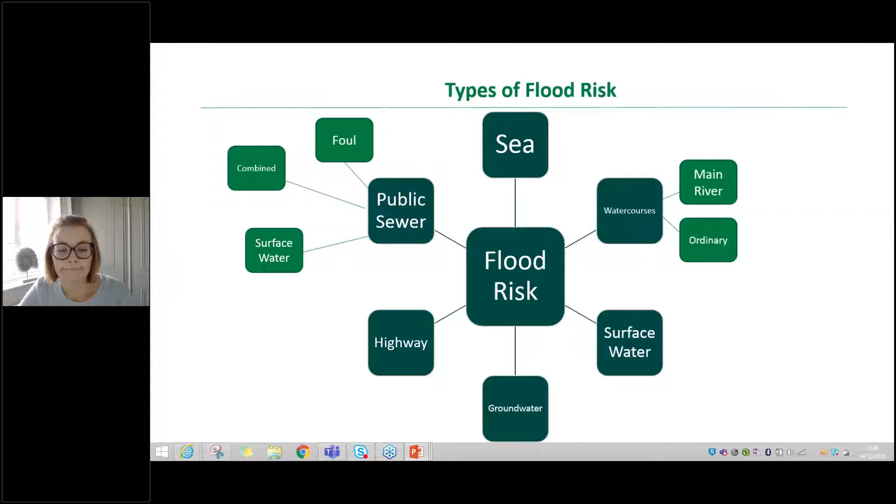So when we look at the different flood risk and we put on top of that the flood risk management authorities, you can see that there are a number of different flood risk management authorities, and these include the Environment Agency, who are responsible for flooding from the sea and also flooding from main rivers, which you can see on the box on the right hand side there.

You've got the Lead Local Flood Authority, which is responsible for regulating flood risk from surface water, groundwater, and also from ordinary watercourses. You've got flooding on the highway, which remains the responsibility of the Highway Authority. So that is typically your county council or unitary authority, but it's a separate department within those councils typically. And then, of course, the Water and Sewage Company is responsible for flooding from sewers. Next slide, please.

Okay, so what's the connection between flood risk and planning? Well, it sounds quite obvious, doesn't it? But put simply, if any new development or redevelopment or any changes in land use are not properly managed, they could negatively impact on our environment by increasing the surface water runoff during rainfall events, leading to an increase in flood risk either on site or elsewhere. They could also increase the number of properties at risk.

So, for example, if you build properties in a floodplain or in a surface water flood zone where it's inappropriate to build those properties, you could put more properties at risk of flooding. And as I said earlier, any property built after the 1st of January 2012 is not eligible for funding from the government to resolve those issues.

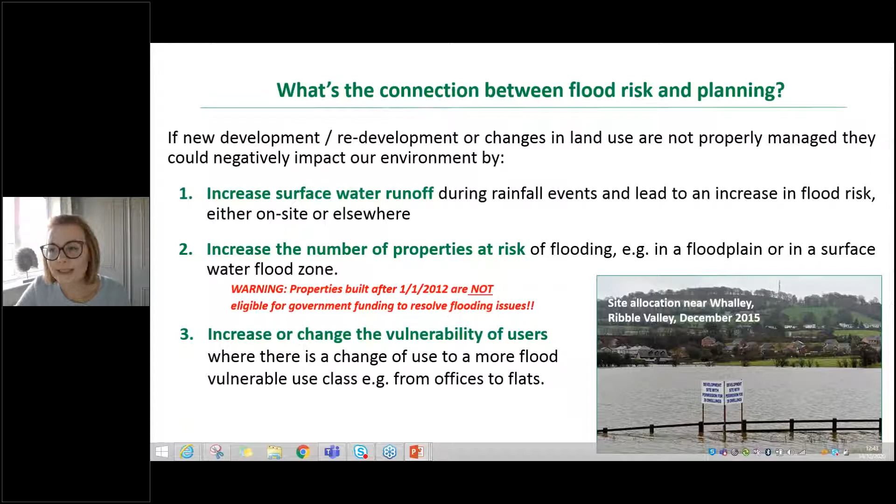One of the things Sophie and I don't want to do today is focus on the negatives of flood risk and planning. We also want to look at what the positives are and what the opportunities are that development can bring. So we recognise that new development and redevelopment or changes in land use is also an opportunity, because we can better manage flood risk by better managing our water on those sites, so that it becomes less of a problem and more of a feature.

Leading on to point 2, we can enhance the landscape of flooding. So what I mean by that is where you do have site allocations, where part of the site allocation is in flood zone 2 or 3, or is at surface water flood risk, rather than simply just leaving that land undeveloped to soak up that water, actually looking at that as an opportunity for enhancing that flooded area.

So, for example, could we make a wetland or some form of habitat that will enhance the biodiversity as well? So if we have to leave it undeveloped, okay, fine, but what can we do to improve and enhance that area of attenuation, if you like, or that area where we're going to allow it to safely flood?

Point 3 is around contributing towards a network of blue-green spaces, providing amenity value and a range of benefits to people who live on those developments and also visit and work on them as well. So, for example, there's loads of health benefits where people like to be alongside water. It's supposed to be very calming. It attracts loads of wildlife. It contributes towards biodiversity net gain. It encourages people to get outside.

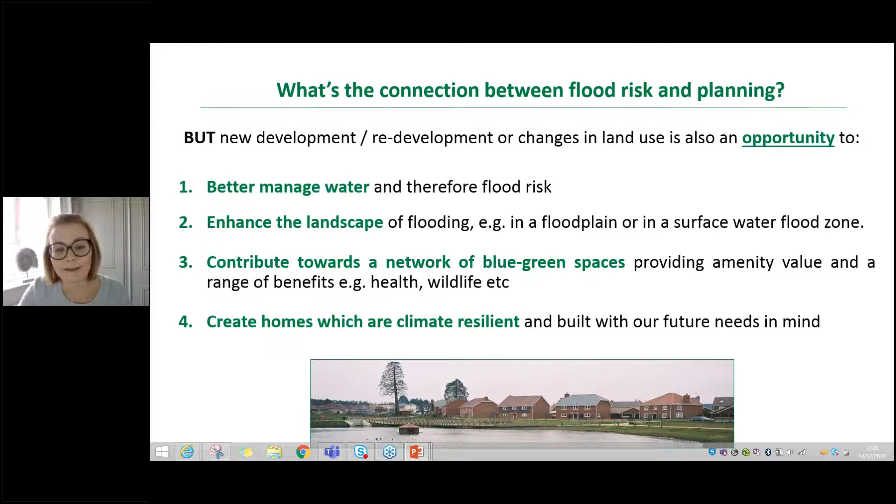So in terms of what are sustainable drainage systems and what do they do? Well, sustainable drainage systems are designed to control surface water runoff close to where it falls and to mimic natural drainage as closely as possible. That you can find in the planning practice guidance under the flood risk and coastal change section. Sustainable drainage systems have fundamentally 4 pillars: quantity, quality, amenity and biodiversity.

Water quantity looks at controlling the quantity of runoff from development to support the management of flood risk and maintain and protect the natural water cycle. The quality aspect is looking at managing the quality of the runoff to prevent pollution. So in other words, how do we require a treatment train to be installed to capture those pollutants and ensure that they're not causing an issue further downstream in those watercourses?

And not just our watercourses, but our bathing waters as well, because we often forget that eventually that water has to go somewhere, and we want to make sure that it not only improves our water quality, but also our bathing water quality as well. In terms of biodiversity, helping to create and sustain better places for nature, contributing towards biodiversity net gain and natural capital. And of course, amenity, to create and sustain better places for people.

So that's all about the urban design, it's about the placemaking, it's about what sort of communities do we want to build going forward, and how are we integrating sustainable drainage at the heart of that to allow that to be achieved effectively. Just some photographs there on the bottom, to give you an example of a swale, which is one sustainable drainage component. You can see what it looks like there in dry weather and what it looks like in a storm event.

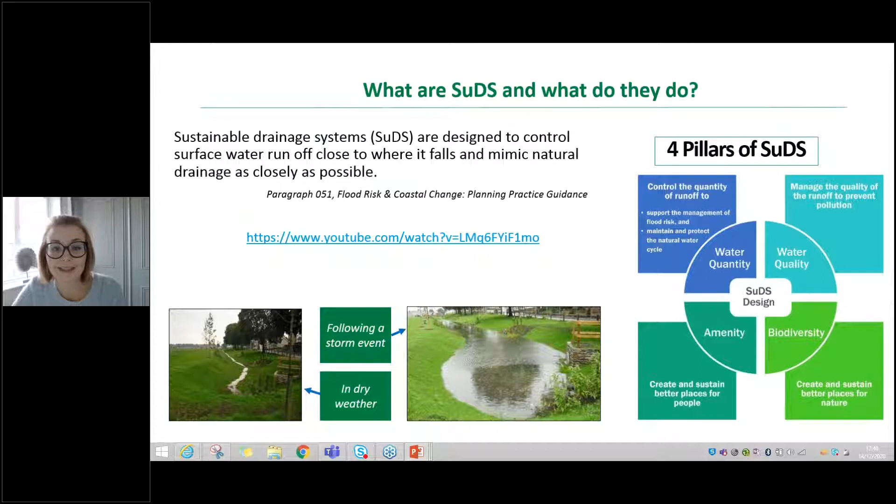And it's a really good way of communicating to residents and politicians and other people who visit the area the fact that that swale is actually doing its job. It's not a problem, the fact that it's filled up, it's actually doing its job. Next slide, please.

So in terms of what sustainable drainage components there are, they can be broadly split into 3 categories. The first one being source control, which basically means that where the water falls, at source, those components will help to gather that and to manage it really well. Source control measures are particularly good for managing everyday rainfall. So they're those either short, drizzly events, or the ones that aren't particularly heavy rainfall.

They're particularly effective at managing that and actually holding the water back out of the drainage system entirely by helping it to absorb into the ground and to capture it through things like water butts, green roofs, grey water recycling systems and things like that. So basically it's about how do we capture that water and how can we prevent that from getting into the system in the first place. The second one is then looking at conveyance. So these are sort of transport sustainable drainage components.

They can be both rural and urban. A really good example is shown on the photographs there, where you can see a linear swale, which is green, which is integrated within the housing development on the left one, compared to the concrete rill on the top right, which is, as you can see, in an urban area, and it's separating an area where pedestrians walk and service vehicles go through that urban centre from some bike storage facilities as well.

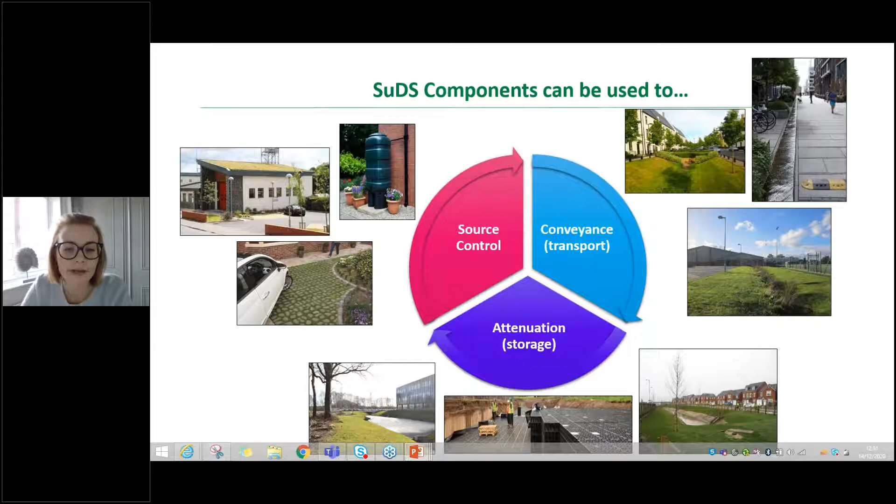So what does the National Planning Policy Framework say about sustainable drainage systems? Well, it says quite a lot. It talks about everything from preventing development from the adverse effects of water and improving local conditions, to responding to climate change, to building that resilience for the future climate need that we spoke about. It talks about providing adaptive measures to help reduce the vulnerability of places to flooding as well.

But principally, paragraphs 155 to 165 are the really meaty, chunky section, looking at sustainable drainage, but also flood risk management more generally. And they talk about using a SuDS approach to help locate development in appropriate places. So in other words, moving development away from those high-risk flood areas, and not just flood zone 3, which corresponds with the fluvial flood zone, but also high surface water flood risk zones as well.

It helps us to assess the suitability of development and prevent flooding by making new developments flood resilient and flood resistant. It helps to provide measures to enable development and to mitigate problems. But one of the biggest things that I've noticed from a policy perspective is that it includes a new safeguarding policy option to allow planners to actually set aside and safeguard land for current and future flood management.

So particularly around sustainable drainage systems, I've started to have conversations with planners in my area about going forward with their local plan revisions, whether they would look at safeguarding, particularly on major developments, a percentage of those sites for sustainable drainage systems, in the same way that we can safeguard or require a percentage of a major development for public open space, for example.

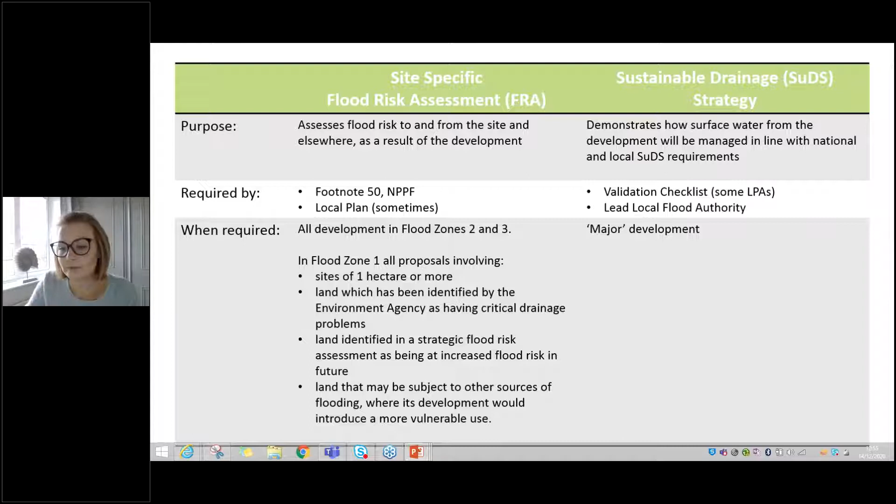Regardless of what the NPPF says and regardless of what we say as flood risk management authorities, we absolutely have a dependency on the planning system to deliver successful sustainable drainage systems. That's all the way through from the initiation discussions around what are the ambitions of the local authority, what are the ambitions of the developer, through to the design of the sustainable drainage system and fundamentally the design of the development as a whole. And then looking at the approval stages, so getting that planning permission, the consultation process, etc., through to the construction, where building control go out and will inspect. If there's any issues during construction, there need to be amendments, particularly non-material amendments, to those planning permissions. Again, that is down to planners.

Through to maintenance and enforcement as well of any of those planning conditions if things do go topsy-turvy. So there's an absolute dependency on our development management planners and the planning system to be able to deliver those successful SuDS. There's only so much we can do as flood risk management authorities, and we are absolutely committed to working with you and building those relationships to enable that integrated working to happen to deliver those high quality sustainable drainage systems. Next slide, please.

One of the things I just wanted to touch on today was looking at the hierarchy of drainage options. So fundamentally, this has come from the planning practice guidance, and this describes and explains how surface water from a development site is expected to be discharged, in order. So developers are expected to explore how they would discharge or get rid of that water by putting it into the ground through infiltration, then putting it into a surface water body such as a pond or a swale or a watercourse, and then looking at discharging it to a surface water sewer, a highway drain or another drainage system, before then, as a last resort, looking at a combined sewer option.

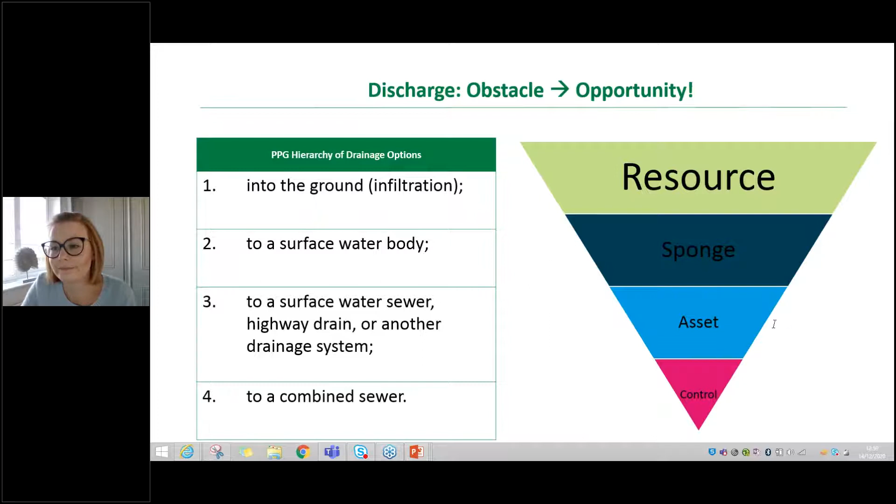In terms of the benefits of sustainable drainage systems, there are so many benefits, and we've spoken already about quite a lot of those, but they help to facilitate sustainable economic development, high quality and inclusive design, regeneration opportunities. They protect and enhance the environment. They can create urban resilience as well. They obviously contribute towards biodiversity net gain and natural capital, and towards a low carbon economy and transition towns. They contribute towards really great space and placemaking, and of course they help develop a focal point for communities.

We just want to draw your attention as well to a tool that has been developed by CIRIA, C-I-R-I-A, which is called the BEST tool, which helps measure the multiple benefits of sustainable drainage systems. And at the end of the presentation, you can find a link through to the BEST tool there as well for you to use after the presentation today. Next slide, please.

Okay, so policy plus development management equals successful SuDS. So the starting point for development management decisions is the development plan, and a key material consideration of that is, of course, flood risk management and looking at how we can contribute towards blue and green infrastructure and how we can build in climate resilience. But whilst the NPPF is good in many ways, its overarching purpose and function means that its content and instructions tend to be broad in tone. Local plans can contain really good policies regarding SuDS, even if these frequently involve interpretation and debate regarding their application.

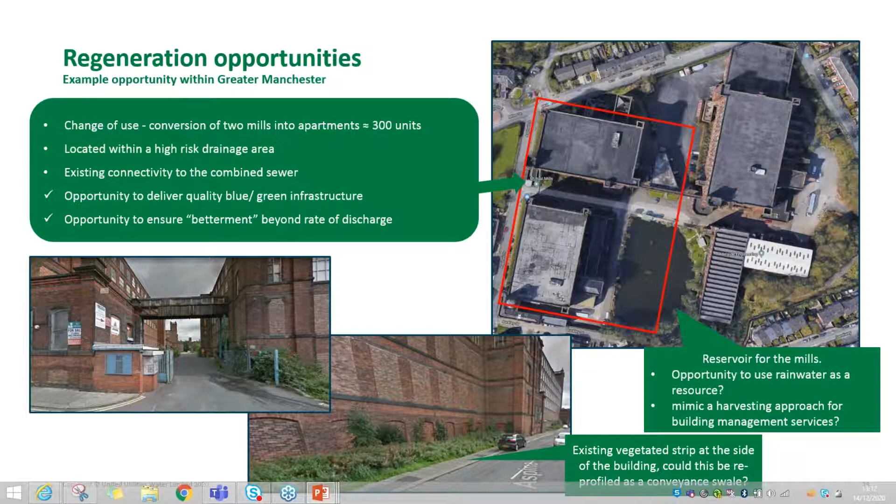But now, before we go into the development sites, and I suppose this applies more to the greenfield site scenario, I just want to remind people of what the SuDS approach is. So it's informed by the site characteristics, and it tries to mimic the natural hydrology of a site. So Laura's talked before about source control. So how do we first and foremost use it as a resource? And then in terms of source control, how do we manage it close to where it falls?

Manage runoff on the surface, allow it to soak into the ground via infiltration, promote evapotranspiration, which is fundamentally water being taken up by plants and transpired, as well as evaporation from the leaves. Slow and store that runoff to mimic what happens naturally, because it's not natural having hard surfaces that generate a lot of runoff quickly and take it to that receiving environment. And then how do we treat it as well as required?

So these images are taken from the CIRIA manual that just shows how you can consider where those natural flow paths are across the site and those areas that are suitable for infiltration. How can you then start considering, well, where does water naturally pond on that site based on the topography and levels? Is there a natural low spot where water would naturally accumulate?

And then thinking, okay, well, actually, can we have a linkage between the blue and green infrastructure on the site? So can we here utilise that for that water storage and provide that as part of our green space and public open space allocations? And then starting to map out the network of where that drainage may need to go.

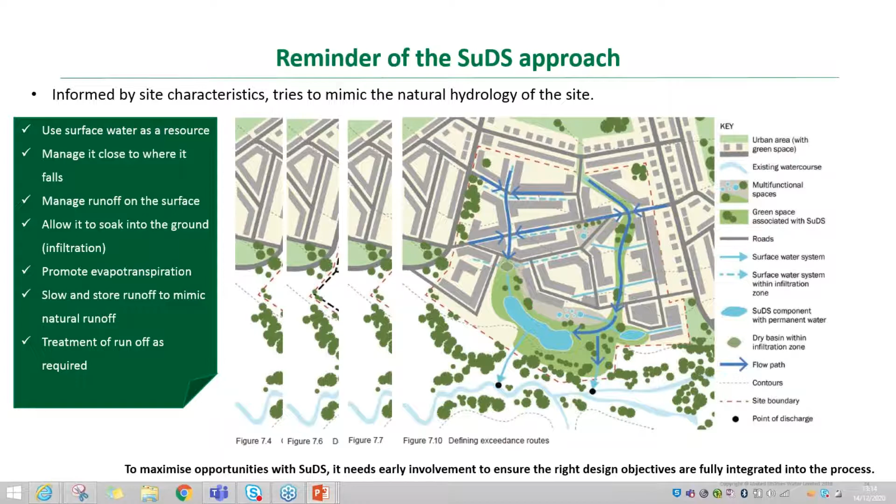And then lastly, once you start having houses there, how do you look at the exceedance routes so that actually you've got climate resilient infrastructure and development, that housing layout's been informed by how water flows across that site and how a flood and exceedance condition would go across the site as well.

So again, SuDS and blue-green infrastructure, there's a natural and strong relationship with them, just to reinforce that. It's about working with the natural landscape, and it's central to the delivery and performance of SuDS. It is just a key function of blue-green infrastructure. So I'm conscious we did talk a lot about flooding earlier on, because I think that's really important for people to have that awareness. But actually, all sites, regardless of size, location, flood risk, how do we make sustainable drainage business as usual to access all those wider benefits?

So some points to think about. So I guess this is learning from experience now as we start to talk a bit about adoption in a minute. So there's a lot of evidence that well-designed SuDS provide many health benefits. The blue-green space is important for urban quality of life. It helps with things like air quality improvements, moderating extreme temperatures, heat island effect, etc., mental health and well-being, and promoting physical activity. But one key thing is actually well-designed SuDS for amenity are also usually safe SuDS.

And that's just one thing that I want people to think, how can you look at that earlier? Because as well, that'll also mean that it's more likely to be in accordance with best practice guidance in terms of its design, which therefore means it could be adopted, because we do have challenges where we're unable to adopt some systems that are presented because everything's fixed and they haven't actually designed it in accordance with standards. So the better looking and more natural it looks, the more it tends to be welcomed by a community as well, and that's really important for placemaking and developing communities. And again, good visual appearance usually results in a safe design.

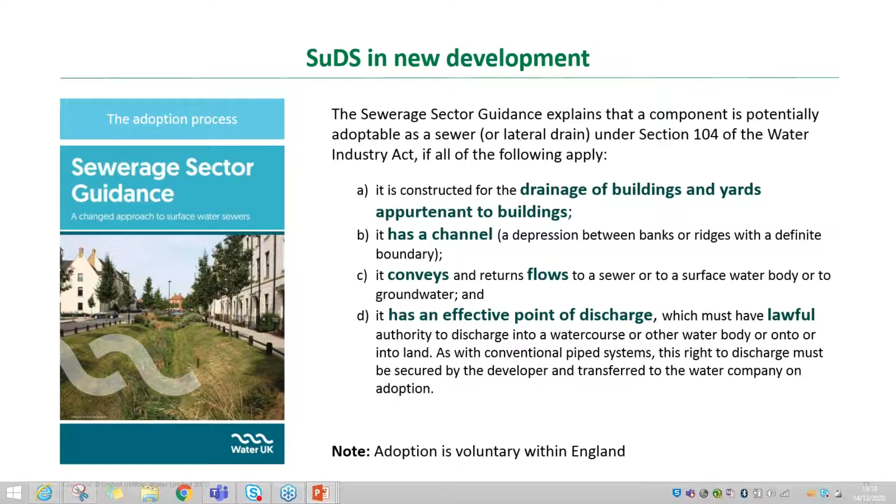So in terms of the adoptable components, these are just images taken from the CIRIA manual. It just shows that these are ones that can potentially be adopted. Now, it's just important to say that we still don't have a legal basis to adopt SuDS, but instead we're saying certain SuDS can come within the meaning of a sewer. So it does feel like perhaps stronger policy and legislation is still needed within England.

And our statutory obligation is actually to ensure we can effectively drain a site. So sometimes there are just partnership approaches with local authorities and with management companies, etc., as well, in terms of maintaining things in accordance with any planning approved landscape management plan.

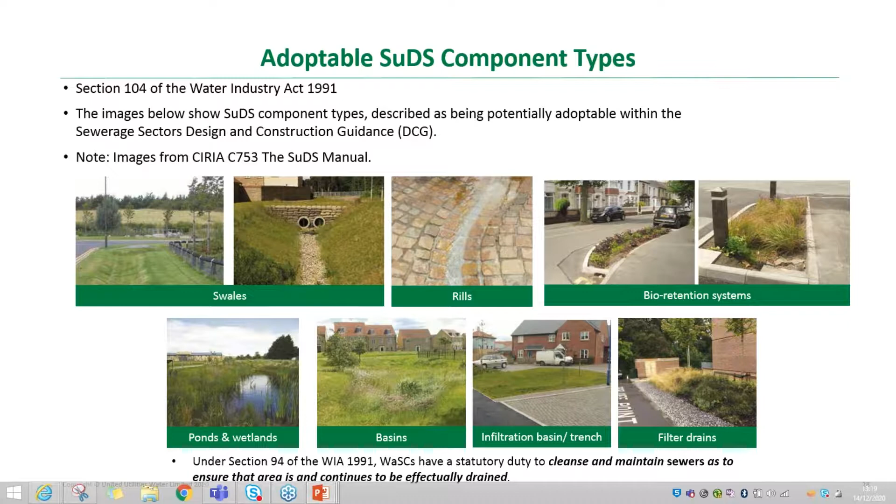So SuDS in new development, expectation versus reality. So I suppose this slide's a little bit tongue-in-cheek because the majority of the slide is showing what's regarded as best practice within the CIRIA manual. But actually, it's fair to say that the industry is learning, and if we continue to consider drainage as detail to be

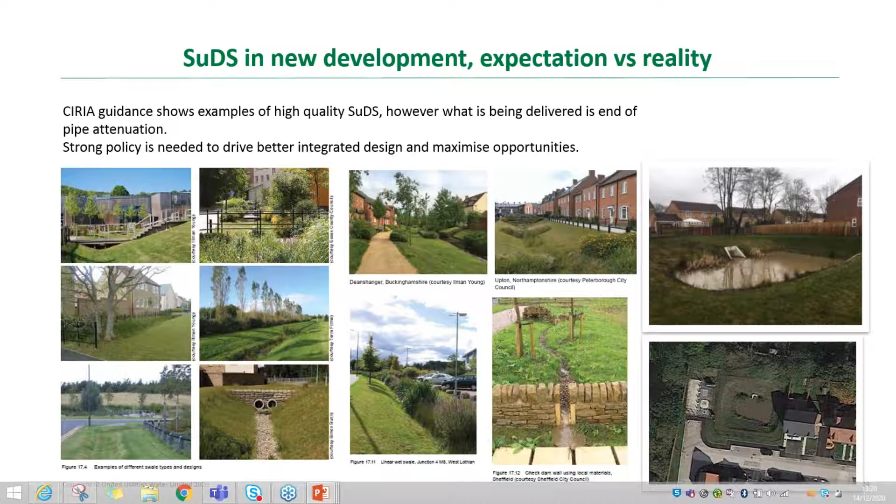sorted later, unfortunately, when they're retrofitted into an existing layout, you end up with something like this, which is not a well integrated pond. It's in the corner of a site. It's silted up already. You're just missing those opportunities, and that's why it's got to be landscape led, in my personal view.

Some observations, so just to highlight, designs are typically end of pipe attenuation. We want to avoid angular shapes and corners, avoid use of a single gradient, but we also want people to specify products that are suitable. A head wall similar to this is perhaps not suitable for an area of public open space.

And consideration also needs to be given when planting is established within that development site, not just to be left for a period of time so that you get a big weed problem. So yeah, just to give you some of those observations to date.

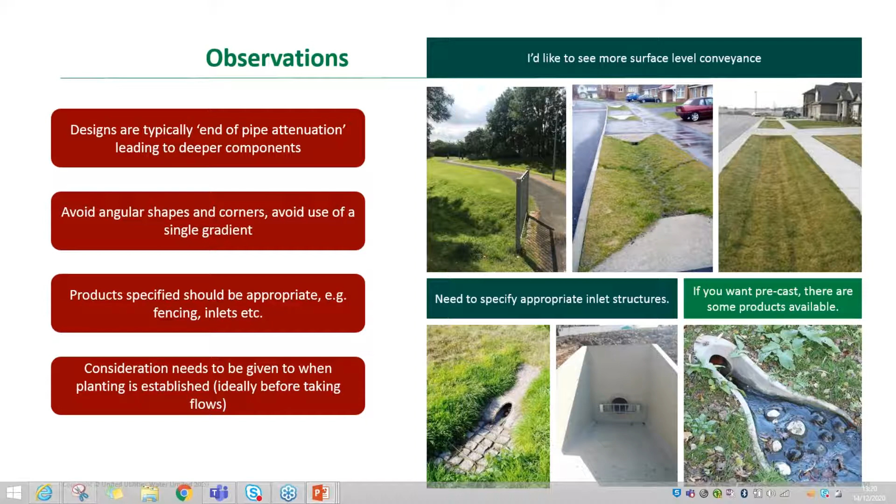This is an example SuDS pond designed to CIRIA C753. That should say basin actually, because it's an infiltration basin. But it was just giving you an insight of certain things that we as a water and sewerage company have considered with regards to health and safety and maintenance.

I won't go into maintenance, however, health and safety: the fact that it's visible and overlooked by properties, the fact that it's usually a dry feature, its water depth is controlled, the slope is compliant with the minimum design standards, and safety signage will be sufficient there to just educate people that it will fill with water in times of wet weather.

And then you might not be able to see it here, but there's actually a clear exceedance route to make sure that in storm events above the 100-year plus 40% climate change, if that did then overtop, it would be conveyed to a safer location away from the likes of a foul pumping station.

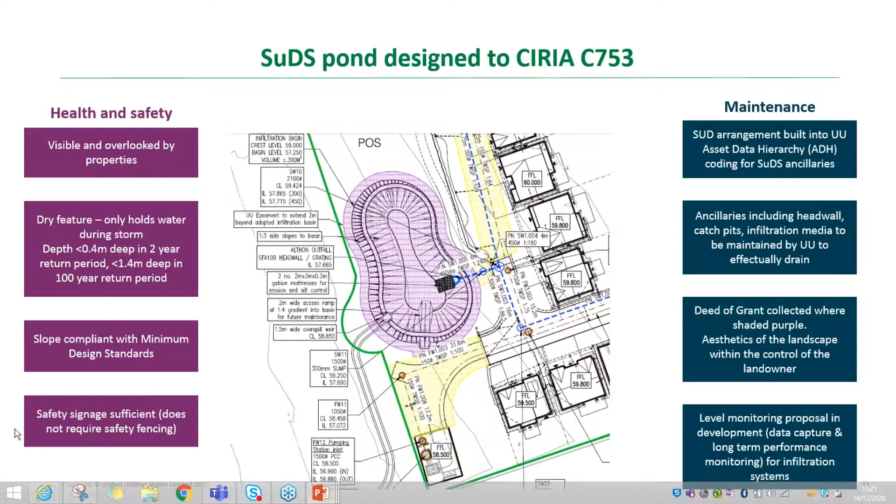So this is a pond showing you now, rather than design drawings, an actual example. So for maintenance in this one, we can actually park up if we wanted to in the site compound. They've got a sediment forebay with a hard engineered base, so we can just turn up and desilt that perhaps biannually, making sure it can effectively drain, as we said.

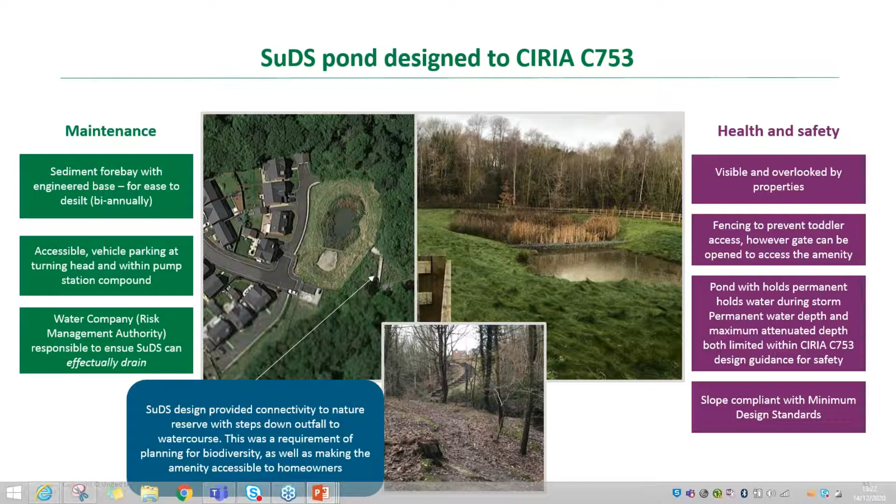But what's good about this is it's quite an innovative outfall design. It's sort of using gabion basket steps where it discharges down that slope to the watercourse. I should show you that on the screen just there. And it actually provides connectivity to an existing nature reserve. So again, when we're thinking of amenity and biodiversity, there's a lot of value in doing that.

So just to reinforce that, changes are on the horizon. We are expecting the revised non-statutory technical standards for SuDS during spring 2021. And it's likely that the Northwest SuDS Task and Finish group will take account of those and update that document. And looking for people, if anyone is interested to get involved, that'd be great, if you could drop us a line and let us know.

The planning white paper, we know there's a lot going on there. They're looking at a move towards a technical details consent process, and could the pro forma approach facilitate that? But the non-statutory technical standards, there's new opportunities in there around delivering interception, which is explained this time in a better way, perhaps through managing everyday rainfall, which hopefully will drive those types of SuDS that we want to see in terms of surface level conveyance for green infrastructure to achieve that.

But should the long term for all of us as flood risk managers, planners, placemakers, designers, engineers, be to move away from below ground storage towards a bluer and greener future? Personally, I really think that should be what we aim for. And then in terms of further reading and sources of information, if you want to find out more after what you've learned today, there's some sources: susdrain.com, the SuDS manual, and other recommended publications. The Cambridgeshire Flood and Water Supplementary Planning document is a really good document as well.